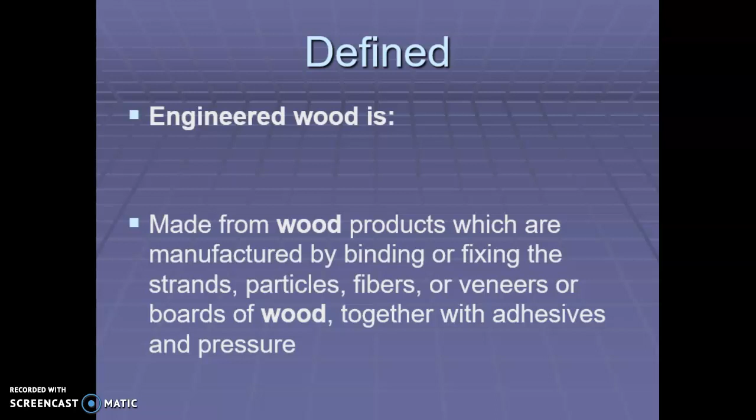They also are not very straight. They cup, they warp, they bow, they move all kinds, everything. They tend to shrink a lot on us. Engineered lumber has very little shrinking, very little crowning, which is basically how it moves. It really doesn't shrink, it doesn't twist, cup, bend, crown, move. In other words, it doesn't deform. It's very stable. Now, under wet conditions, that's another story. Obviously, every product, specifically lumber product, will deform under moisture conditions. But again, engineered lumber tends to hold up exceptionally well just under typical environmental conditions.

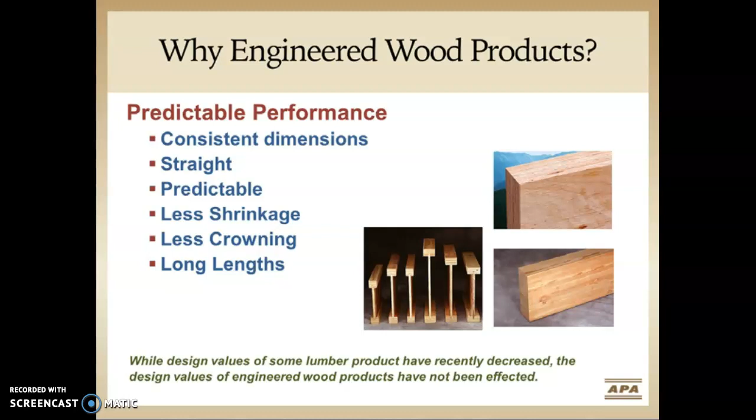Then you have your I-joists, your floor joists, and you guys have seen those in class, and I'm going to show you a whole lot more of those. And then you have your OSB, oriented strand board, and that is running perpendicular once again to your floor joists. So this is where you're going to see all your structural engineered components come in. Off to the right, what you have here is a header. And look at this, the wall studs are actually made out of OSB. In other words, engineered lumber.

Now, down here is a variety of structural components I just wanted to talk to you about and how they're made. Let's start over here. These two should look pretty familiar. These are the glulams. Remember when we glued our little sticks up in class and stressed them? That really would be considered engineered lumber. We took solid dimensional lumber. You can see this is solid dimensional lumber, glued it together and made a strong member. Then over here you have, let's see, this looks like an LVL, laminated veneer lumber. What this is, is slices, big slices, all these different layers glued together.

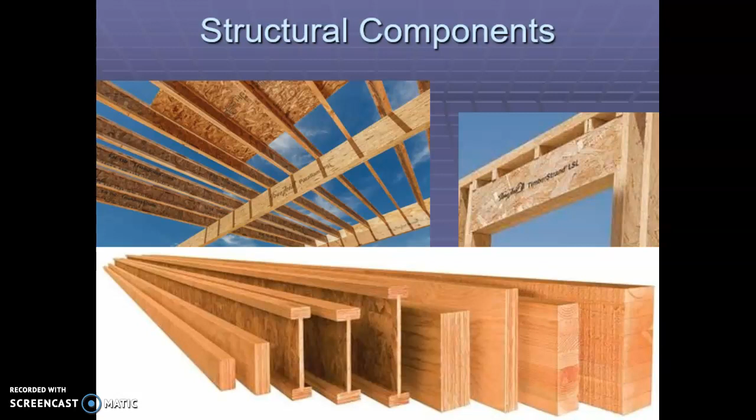So all of these products here are considered engineered lumber. Everything there is engineered lumber. It's a byproduct of wood. This just happens to be laminated wood 2x4s. This looks like laminated wood 2x6s. Cool. Where else are we going to see it? Yikes, we see it all over in our subfloors.

So this is OSB is what you guys are looking at, and again, I'll go in a little more depth on that. It's called tongue and groove. On a tongue and groove kind of fashion here, the tongue fits into the groove and prevents shifting of floors. On over here, this is your decking, your subfloor already complete, and these lines here are represented right here. So underneath of those lines, you have a tongue and groove scenario very similar to flooring to prevent these from buckling, cupping, warping, moving. So it's a very stable system.

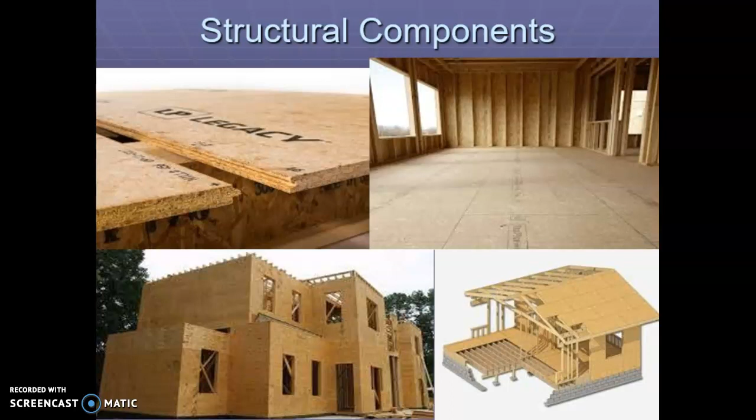Here, what we're showing you is the sheathing of the house is made out of engineered lumber. The exterior of it basically is all out of engineered lumber. And this is just a good graphic, a pictorial of where you might have engineered lumber, and it could be the entire house. They make 2x4s, 2x6s, 2x8s out of engineered lumber. So this is not dimensional lumber. This is engineered. And when I say dimensional, that refers to solid hardwood or softwoods, and typically softwoods when we speak dimensional lumber. Cool, let's get into some different specific types.

This is called plywood engineered lumber. And the reason it's called plywood is because it's made in plies. This is 3-ply, this is 7, this is a 9-ply. When I'm talking plies, if you look in closely right here, you can see all the individual slices and they're glued together. Incredibly strong, okay? Fantastic. It's also fairly expensive too. So it is something to consider.

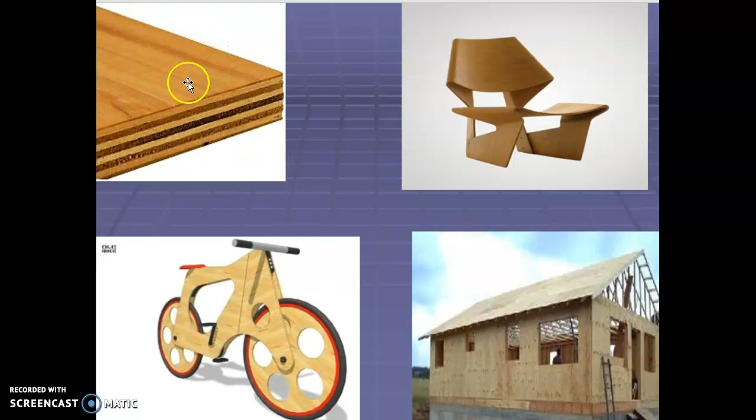It's very strong. It's not always straight. Sometimes it is not as stable as you'd like to believe it is. If we're looking for stability, I'm going to talk to you about that in another piece as far as flat and straight. But this is great for exterior and interior applications as well as finished applications. When I'm talking finished, you can see here it has a really nice layer of very nice wood on the top and then cores that are hidden below. It's a piece of furniture made out of it. Bicycle. I looked at that website. Pretty cool. They make actual bikes out of plywood.

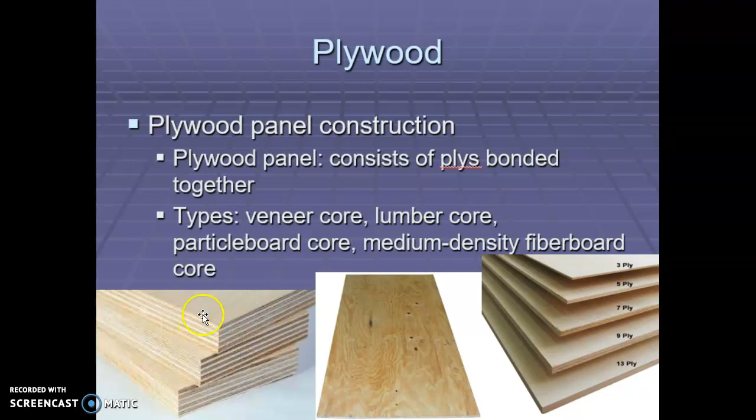And this is a house being sheathed with plywood. Again, it's very strong, very stable. Most of the times it's fairly straight, but not absolutely straight. It tends to bow a little bit. What you're seeing here is plywood with a hardwood veneer on the top. In other words, it's all the plies like this, except it has a very decorative veneer on the top. Now, why do we do that? It's very cost effective. This is a birch veneer, I believe, on top. It's a very attractive looking wood.

In other words, this is a 4-by-8-foot sheet. That's 32 square feet of lumber. You can get something like this for $60 to $90. If you had to buy that out of solid dimensional lumber, that would be probably 4 to 8 times the cost of it if it was solid. So cost effective and strong. Here it's inlaid in a table, a very decorative piece. Here used as the back of the shelves of a bookcase. It looks like real hardwood, but actually it's plywood covered with hardwood. That's one big advantage of plywoods and sheet goods in themselves.

So let's move on. OSB, what I promised you. Okay, this stuff is all over the place. You've seen it down here, lower left, siding, sheathing of houses. You've seen it over here.

It's another example of a close-up of sheathing of houses. It actually ties all your framing materials together, supports the house from racking and moving. Comes in 4x8s, 4x9s, 4x10s. It comes in a variety of sizes. This is just a 4x8 laying down, and this is a close-up of oriented strand board.

Basically, it's larger chips or strands actually of lumber, and this is where they do use heat, pressure, and adhesive to make this material. Great stuff, moderately inexpensive. When I say moderately, I'm talking about $14 to $18 for a 4x8 sheet. That's 7/16 thick. Now, there you go, 4x8 sheets.

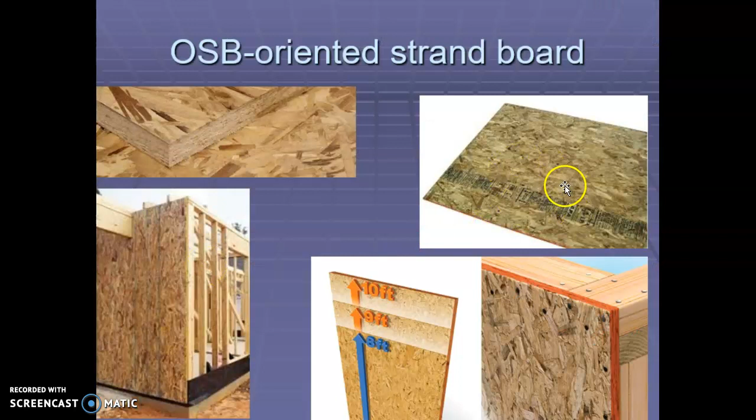So if I'm going to do something like this, and I'm going to use a real high grade veneer on my plywood, it's going to run you $90, maybe even $120 to $160 per sheet. However, if I'm going to do something like this, low grade, that's going to be covered up, like I said, $14, $18, $20 a sheet. So it depends on the quality and, of course, the size.

What sizes do they come in? Just went through that, but also I wanted to make you aware there's other sizes. There's these goofy sizes. This stuff called Baltic birch comes in a 5x5 size. It's actually used often in cabinet construction for building cabinets. So it's really good material for cabinets. It's straight and it's solid.

Now, speaking of solid, we also have these things called chipboards, which is made basically, once again, heat, pressure and adhesives, ground up wood product, pressed together. A little more porous, not quite as strong, not nearly as strong as plywood.

This was a cool one. I've worked with this. It's actually wheat board. It's a byproduct of wheat. And it's cool. When you cut it, it smells like you're in a bakery. It smells good. Hasn't caught on in great popularity.

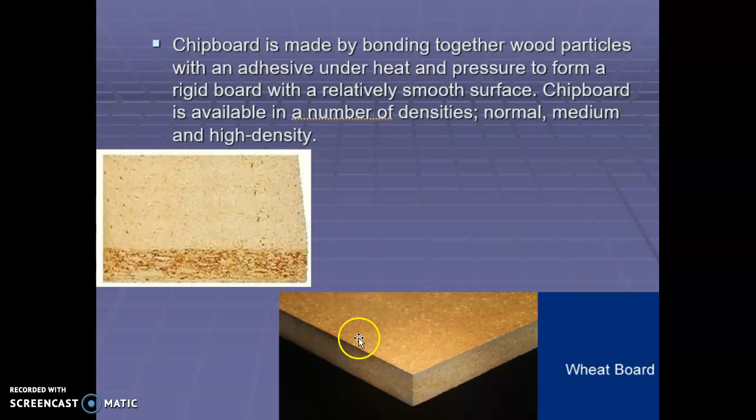I've only used it in a couple homes that were really built for a sustainable feature, and the people definitely wanted a low VOC, volatile organic compound, and very, very sustainable. What would they refer to that? I can't think of it off the top of my head, but basically something that's non-allergenic, basically a very neutral material, and the wheat board was really good for that.

The other one we have, and I'm going to show you in class, MDF, medium density fiberboard. It's very dense, paints up really well, it's really straight, really weighs a lot, not really attractive. However, you could put a layer on that of hardwood and make it attractive.

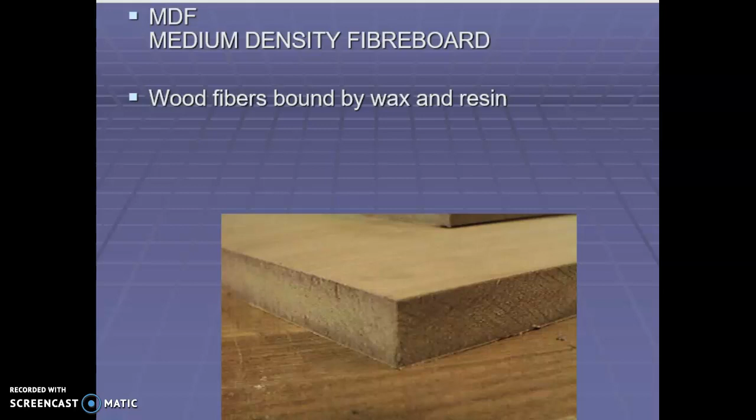Now, let's speak a little bit to engineered flooring. So, flooring even is engineered. If you guys take a look down here, we have the difference. Solid flooring as opposed to engineered. Solid is one thick piece of dimensional lumber, engineered multiple layers. And again, this enjoys the benefits of all the engineered lumber that I showed you at the beginning. It's straight, it's flat, it doesn't warp, so on and so forth.

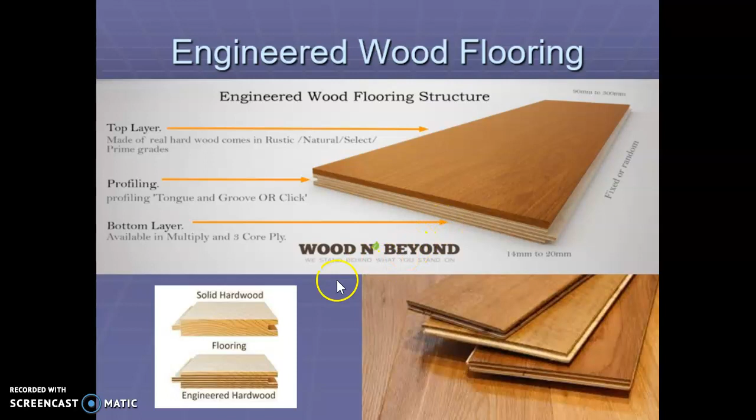It's actually made of layers of solid wood. So it's light layers of solid wood glued together, and it's strong, it's durable, great stuff. This is what it looks like in cross section. In other words, if I took a piece and sliced it. I talked to you a little bit earlier about the tongue and groove scenario. This is so it couples together well, mitigates the movement of it, also locks it in nice and tight.

So again, this is just a couple examples of solid lumber versus an engineered kind of multi-layer lumber. Very similar in terms of how they're installed, but different, obviously, in terms of their composition. So that is a run-through of engineered lumber.

When we get back into class, I will bring out a tremendous amount of examples of it because it's something you do need to know and understand, and have a great appreciation for the big share of the market it holds in our residential construction. So that's it for engineered.